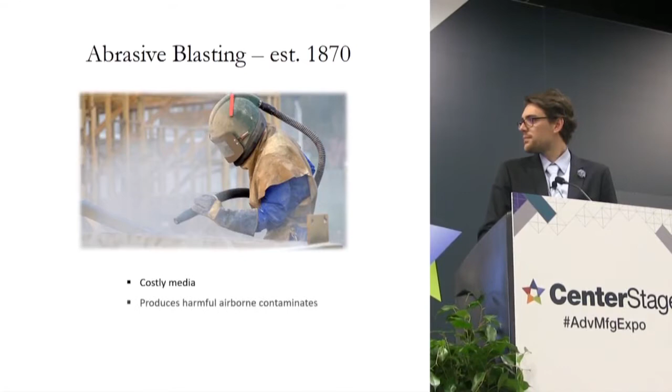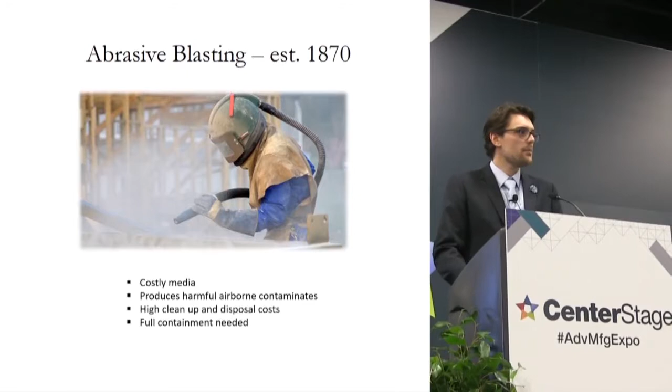Before we talk about the innovation itself, let's go through some of the innovation over the years. We'll start with abrasive blasting, invented in 1870. Typically, abrasive blasting has a higher media cost. It can produce harmful airborne contaminants, which can be hazardous to worker safety. It has a high cleanup and disposal cost, as well as typically needing full containment and negative air when blasting with abrasive.

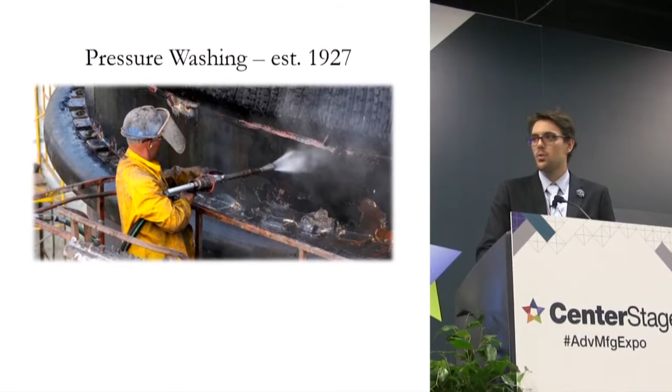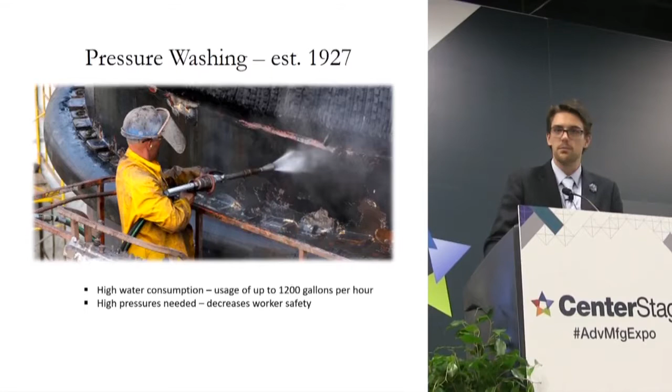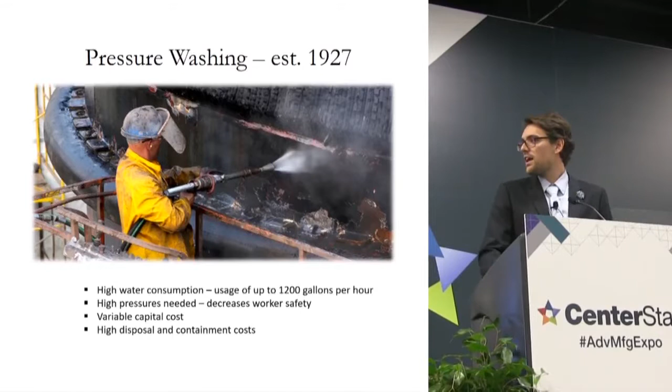The next big innovation was pressure washing in 1927. Pressure washing uses high water consumption, and it varies by technology, but can use up to about 1,200 US gallons per hour. High pressures are needed, which decrease worker safety, typically up to or exceeding 5,000 psi. Variable capital costs mean some larger systems can be in the low six figures. And it has a high disposal and containment cost. If you think of creating 1,200 US gallons of water waste per hour, then trying to treat and dispose of that can be very costly depending on what you're blasting.

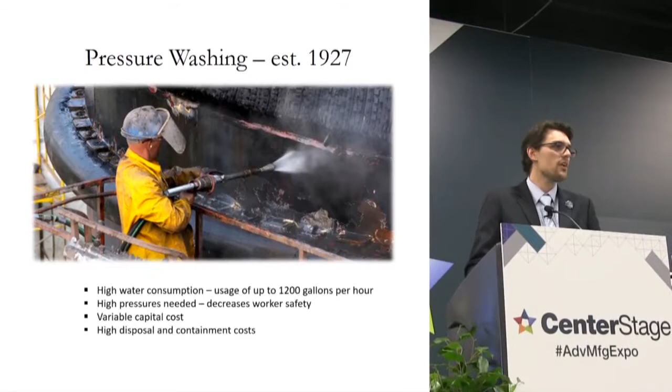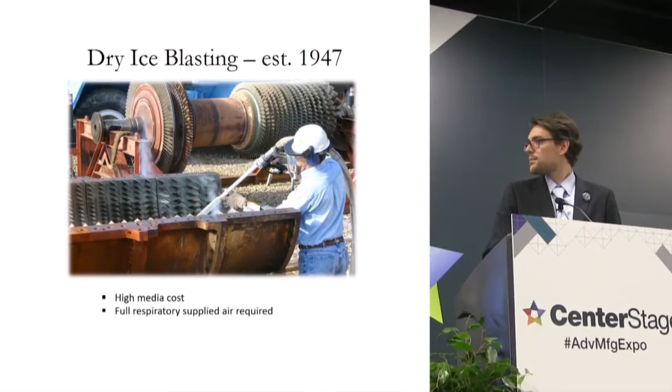The next big innovation in 1947 was dry ice blasting. Some of the drawbacks of dry ice blasting can be a higher media cost. Full respiratory supplied air is required, especially in confined spaces where it can be dangerous to workers. Dry ice can also be, in specific locations, difficult to find, purchase, and store, as well as dry ice sublimates.

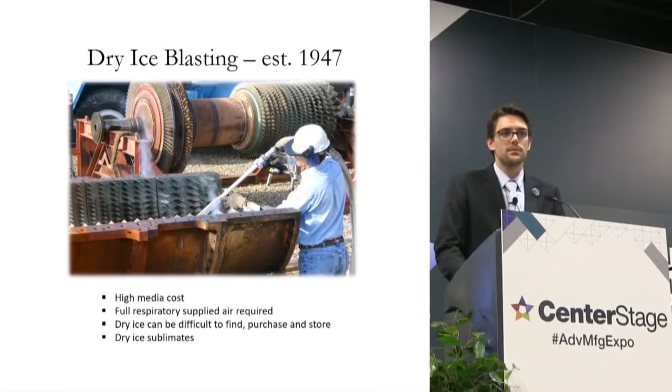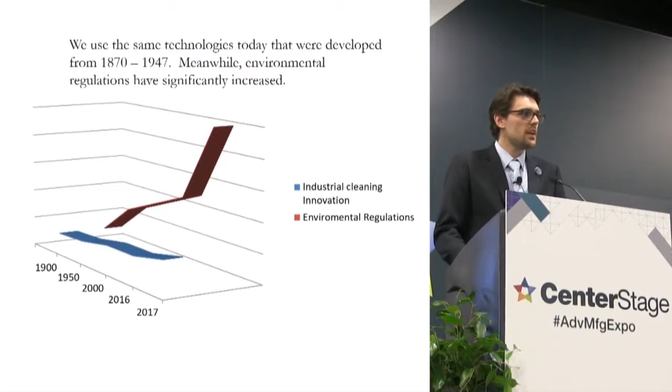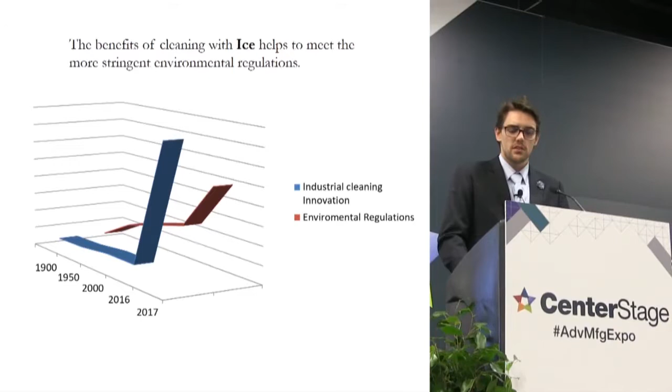So the question we asked ourselves before looking at this technology is what happened to the innovation after that, because it really started to slow down and stagnate. One interesting trend we noticed is that after the invention of dry ice blasting, innovation nearly stopped, while environmental regulations continued to increase. Now, introducing the benefit of blasting with ice made from water, we feel we're meeting a lot more of those environmental regulations being put on today.

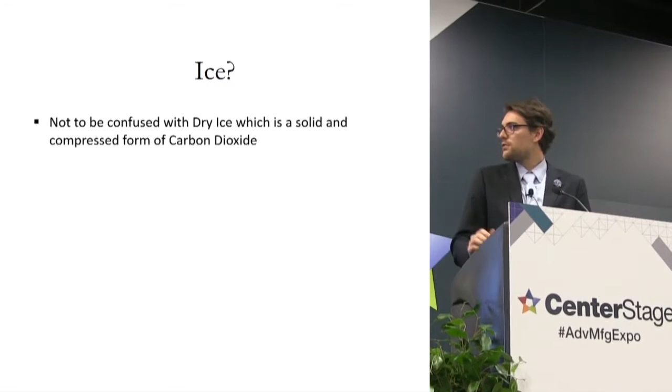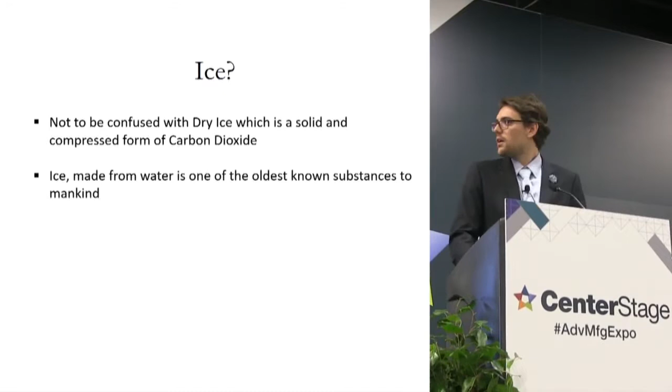So now we'll introduce ice. A lot of people ask us, what is ice? They're so used to dry ice blasting that when you start talking about generic ice, they get confused—our ice is not to be confused with dry ice blasting. Dry ice is a solid, compressed form of carbon dioxide, whereas our ice is made from water, one of the oldest known substances to mankind. The ice we use is typically frozen water at a temperature of about -5 to -7, so you can touch it, you can put it in your drink.

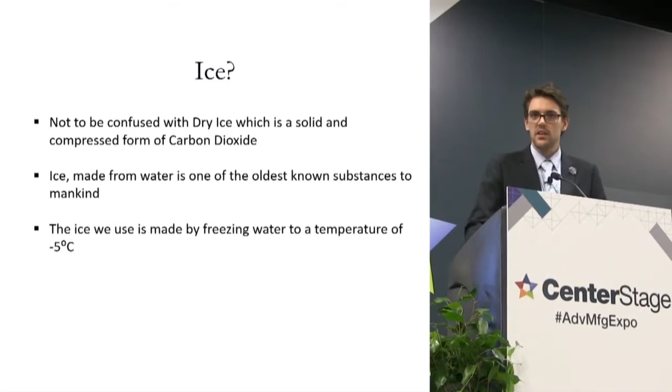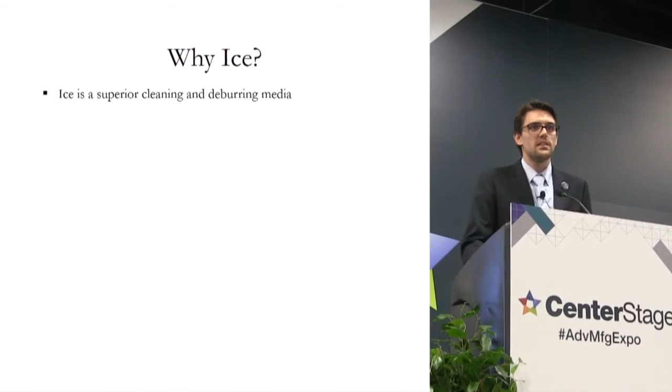The next big question people ask is, why ice? Why is ice made from water better than dry ice, abrasive blasting, or pressure washing? Well, ice is actually a superior cleaning and deburring media. It's the only media that exists in all three phases, which means it hits the surface as a solid, then half of it turns into a gas and evaporates, while the other half stays in liquid form, which pulls all your airborne contaminants down to the ground and creates minimal airborne contaminants.

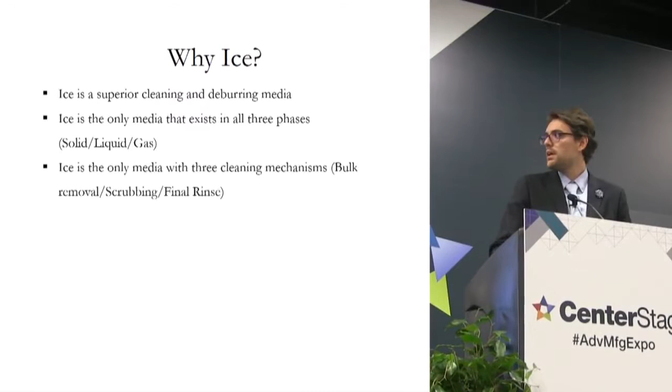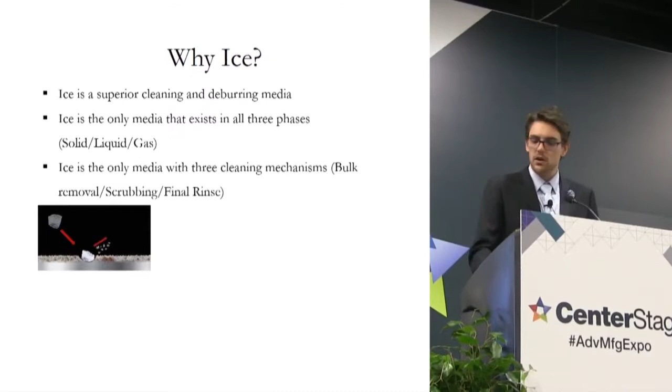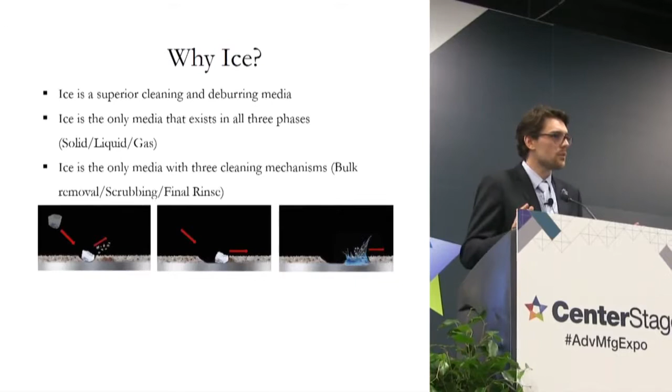Ice is the only media with three cleaning mechanisms. The first is bulk removal—when the ice first hits the object or substrate you're blasting, it removes the major particles. Each new piece of ice then acts like a bristle on a brush, scrubbing the surface. Then there's the final rinse, where it turns into liquid form and creates a clean blasting surface, producing minimal airborne contaminants as mentioned before.

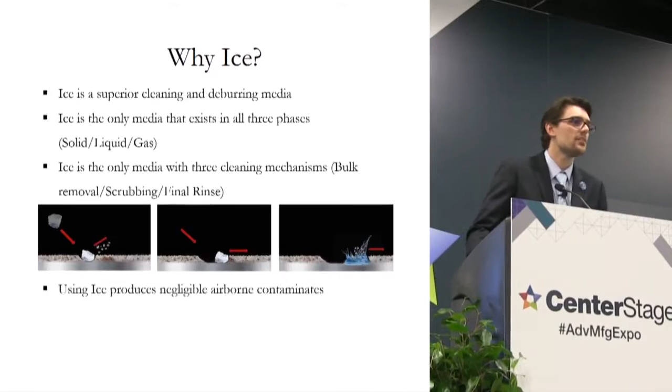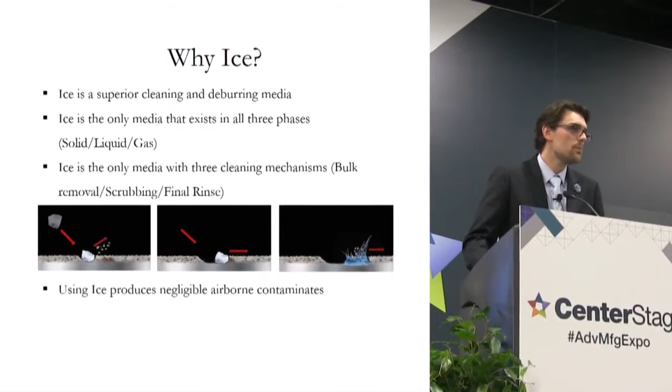Typically, the pressure we use is about 80 psi up to 150 psi, so it's very low pressure. In CFM, we blast anywhere from 100 up to 300 CFM.

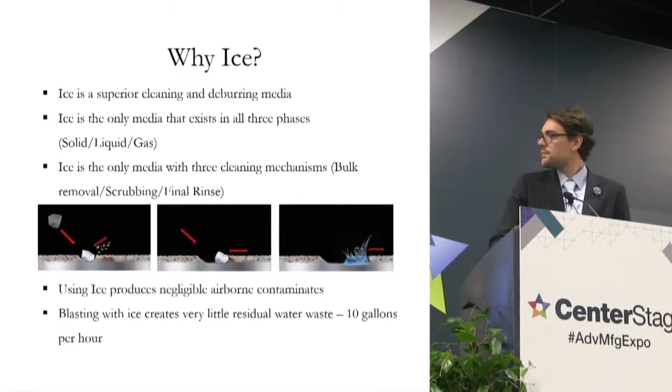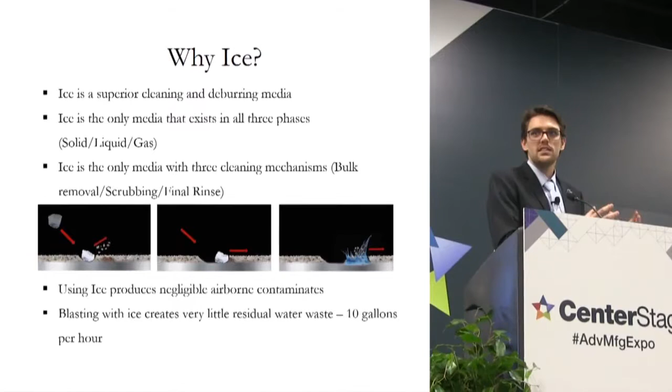Blasting with ice actually creates very little residual waste. On average, blasting at 3 pounds a minute, you'll have around 10 gallons an hour of water residual waste. The easiest way to describe it is if you picture a Slurpee like you buy from 7-Eleven—that's what your contaminant looks like. It looks like a Slurpee right below where you're blasting, the color of whatever you're taking off, whether it's paint, bitumen, etc.

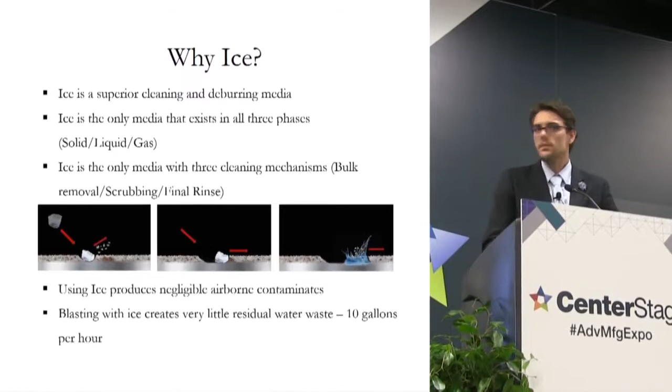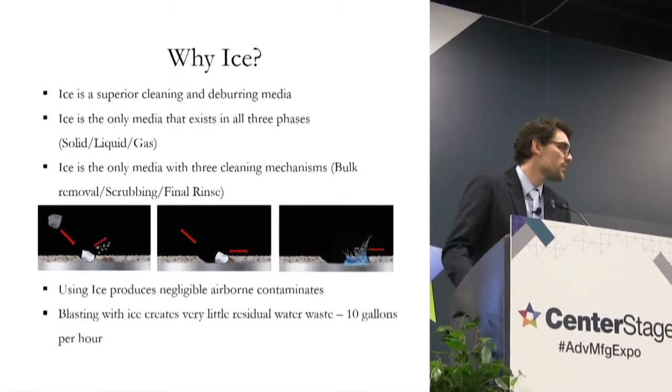Question: how does that 10 gallons per hour compare to a traditional high pressure washer or water washing? For example, high pressure water washing can consume up to 1,200 gallons an hour.

So how can ice help me? A question that's always posed to us.

Ice is a very low-cost media. Of course, it's easy to buy because you can buy it at any grocery store, but also you can make it yourself. With your own ice maker, you can make it for less than a penny a pound. Just ice cubes, bricks of ice.

In industrial cleaning, one of the things people come to us all the time with is that a lot of jobs are on a weekend. With dry ice, you have to buy it on a schedule. So if your delivery period is on a Monday and you're blasting on the weekend, not only do you have to wait for that long and factor in sublimation, but also if you run out on the job site, how do you get dry ice on the weekend? It's very, very difficult.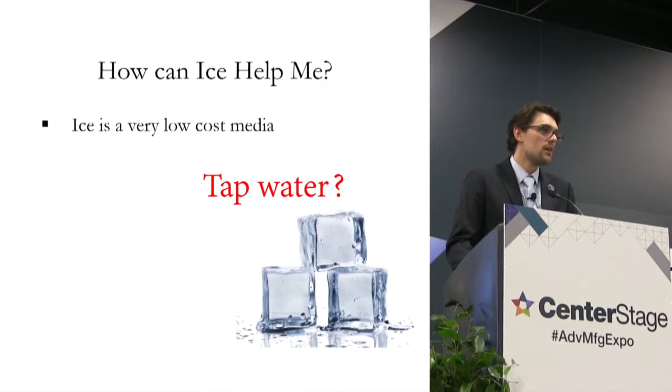Does it need to be a specific water type? It can be made from any type of water source, tap water for example. A lot of ice is made from tap water. A lot of our systems now, the contractors themselves, whether they're in a plant or in their trailers, will have their own ice makers, or you can put it in large totes, 300, 400, 500 pound totes that'll last for 4 or 5 days holding the ice.

Ice is safe to operators. A way we gauge media and how safe it is to an operator is, can you hold it? If it gets in your eyes, are you going to be okay? If you drink it, is it okay? Well, ice, of course, meets all of those.

Ice is a very effective cleaning media, so it's actually, in a lot of cases, quicker to clean with ice than a lot of different other types of cleaning tools out there on the market today.

In proper storage, which is a freezer, ice will last forever. And it has a low equipment capital cost, so the capital cost of the equipment to blast with ice is fairly inexpensive.

So here's a video we did on introducing the technology.

It takes courage to innovate, to push the boundary of normal in order to create something special. To begin with a brushstroke headed into the unknown and come out with something revolutionary. We took that impossibility and created functionality, a masterpiece in its own right, a work of art that is as efficient and powerful as it is elegant and refined. We didn't just build another tool to clean with. We built a highly effective instrument with the unparalleled performance needed to tackle any job. A whole new ice age is coming, and it's going to change everything.

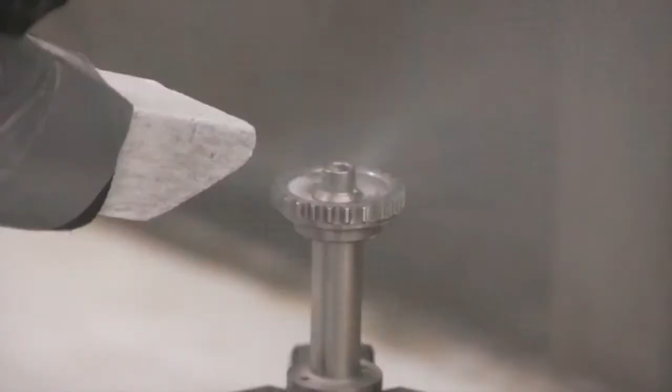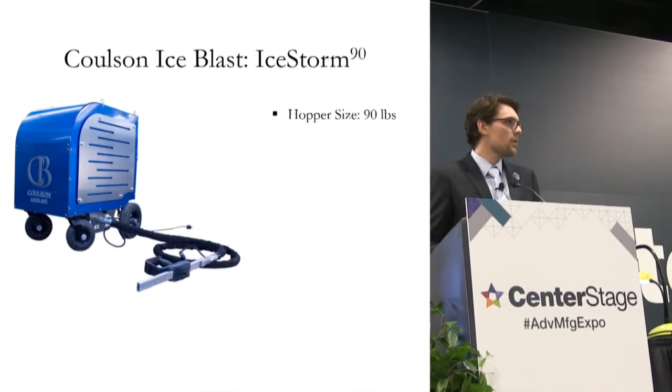This is the technology used that we showed in the video, just some of the quick hits on it. It holds around 90 pounds of ice in the hopper, which, based on your feed rate of ice per minute, will allow the operator to blast for about an hour.

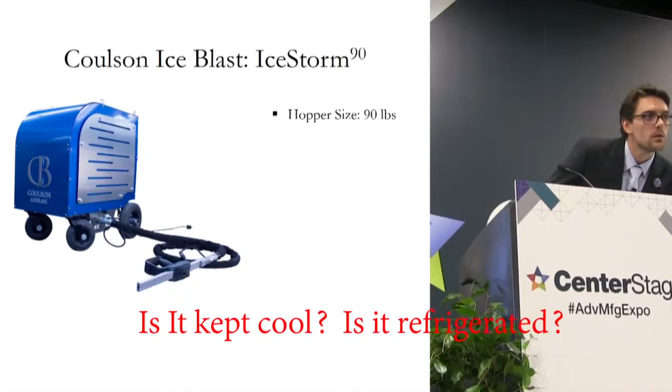It doesn't currently have a refrigerated hopper, but it's fairly highly insulated. So you can leave your ice in the hopper for about 3 hours on a 40 degree day, and you're going to lose about 3 to 4%.

It runs off typical 110 volt power. It has a 48-month warranty. It weighs 250 pounds.

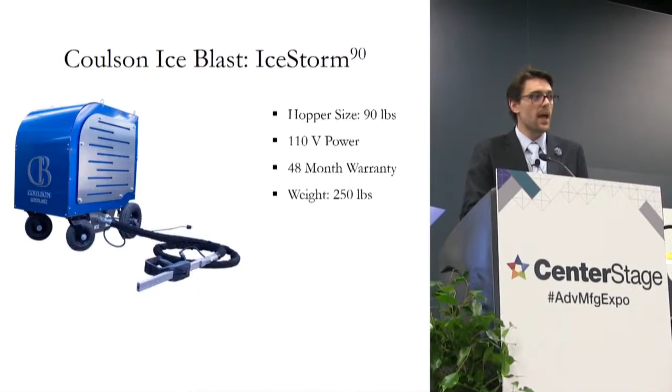Operating pressures, as well as variable ice feed rate. The particle size—when you put your ice cube or brick in, or whatever type of ice you're using, it actually crushes it down, almost like a rock crusher. It has a particle size coming out the nozzle of almost 3 millimeters in diameter, so it's fairly small. We like to think it's about the size of a grain of rice. That's the size of it coming out.

With blasting with ice, there's some advantages and disadvantages we had to work with. Ice is very difficult to move through a hose because you're worried about the heat transfer of the air going into the ice and the melting, so it needs to be run with an aftercooler, for example.

We did have a special set of nozzles developed for the technology. We brought in a gentleman who has the record for creating the gun with the fastest bullet in the world to properly take the ice and see how fast we could get it going. We actually accelerate our ice out of the nozzle to about 600 miles an hour, so it goes very, very quickly—not something you want to get in front of.

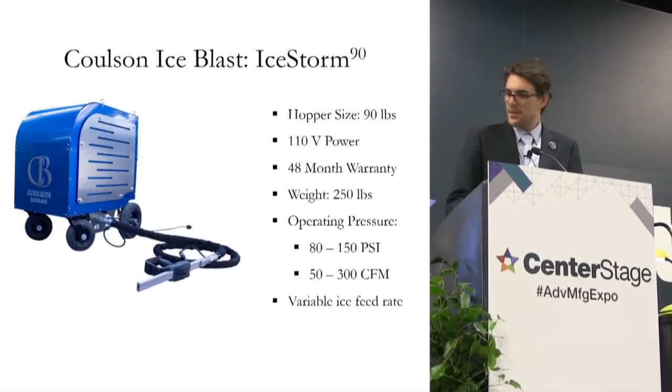Other than that, if anybody has any questions...

Do you have a mic? Can you bring this, Jim?

You need to have power, standard 110 volt, and a compressor of some size. If it's in a plant, a lot of times we just plug into plant air. One of our markets targets industrial cleaning contractors, and the standard compressor they have is about 120 psi, 300 to 325 CFM. So a lot of times that's what we run off of.

How is it better than dry ice? In a lot of applications it's more effective and efficient, just the way the ice works compared to dry ice. Dry ice is a bit of an explosion on the surface, so the surface has to be much harder. With wet ice, we're having a transfer from a solid, and it hits it and has actual mass that transfers into it before it switches into a liquid or a gas. But also media cost is a big component. You can make ice for less than a penny per pound, while dry ice, where we're located in Vancouver, Canada, costs me about $1 a pound delivered. So it can be fairly substantial depending on where you're located.

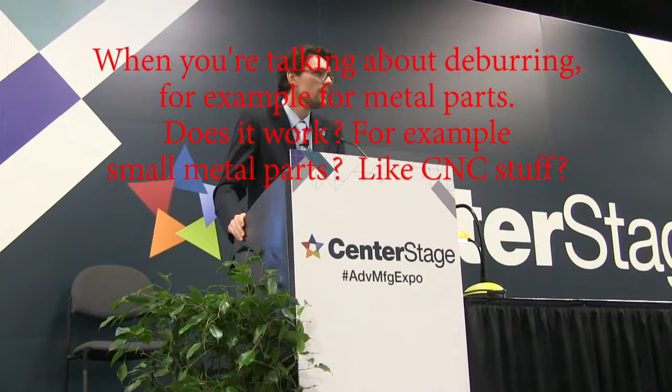We've done systems for Ford Motor Company for deburring applications, deburring gears, and for Denso Bosch, cleaning fuel armatures. So we've done many automated systems as well, which we work on designing and creating. When you're talking about deburring, it's for example for metal parts. Does it work on small metal parts like CNC stuff? Yep, we do a variety of deburring applications, from deburring micro gears to larger machined objects. We have some shots, and we actually have a video at our booth that shows some of the deburring applications we do.

Booth 4090, which is just upstairs.

Is there any other questions? Yes.

Have you done any kind of cleaning of big tank mixers, inside of the tank mixers, automation? We've done Royal Dutch Shell, some work cleaning their big cylinder containers. Pulp and paper mills currently use the equipment in cleaning coatings, rollers, and some of their big mixing pots. This technology was actually developed by the Canadian Navy to clean in confined spaces, with something that is not going to be dangerous for the worker. So that's the basis of the technology. Anything that's a small space you're trying to clean in, the technology excels in that.